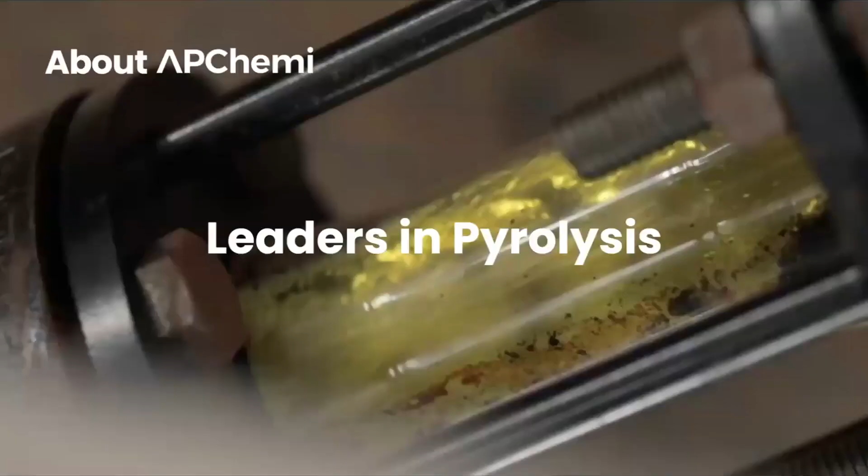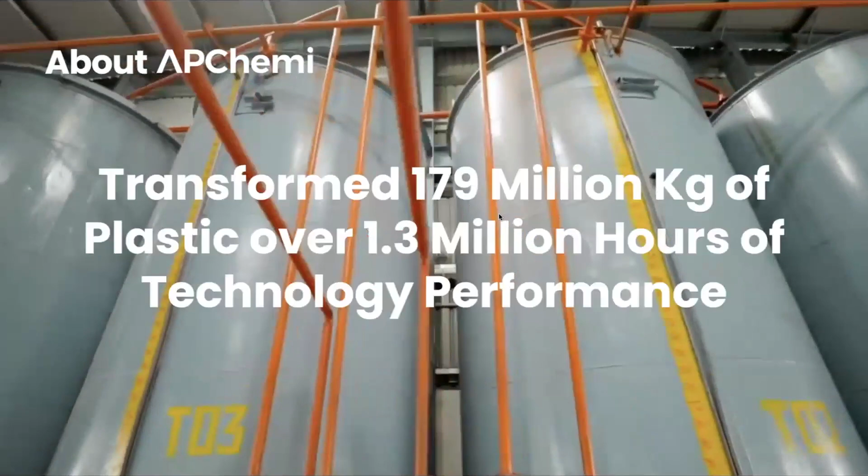A bit about APChemi before we start on the main topic. We are leaders in pyrolysis. We've turned plastic, tire and biomass into value. We've developed more than 47 plants in pyrolysis and pyrolysis oil purification. We've transformed more than 179 million kilograms of plastics over 1.3 million hours of technology performance. We're supported by Shell Petrochemicals.

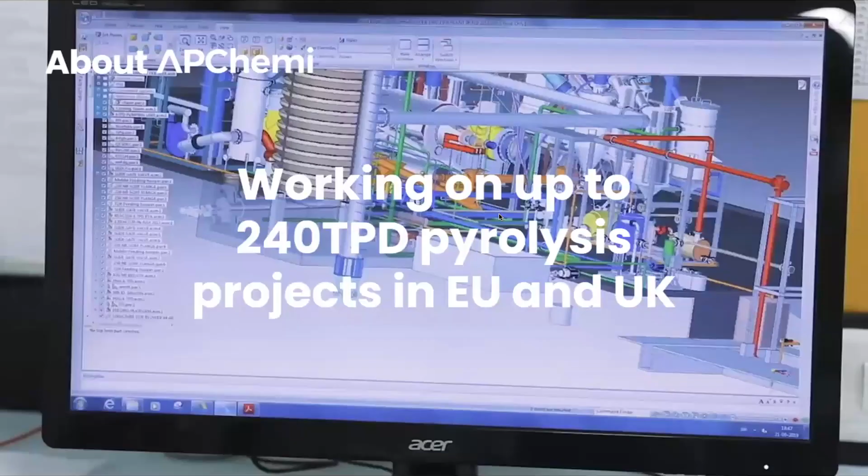Recently, we've worked with Aalborg University to raise funds to convert plastic and biomass into hydrogen. We're working on up to 240 tons per day pyrolysis projects in Europe as well as UK. The projects we have developed till date have created more than 3,000 jobs globally since 2007.

Recently, we have developed over 7 proof of concepts in chemical recycling of plastic waste, where the oil qualities have been approved at global polymer producers. Oil has also started flowing from a couple of our projects into a manufacturer of circular plastics in India.

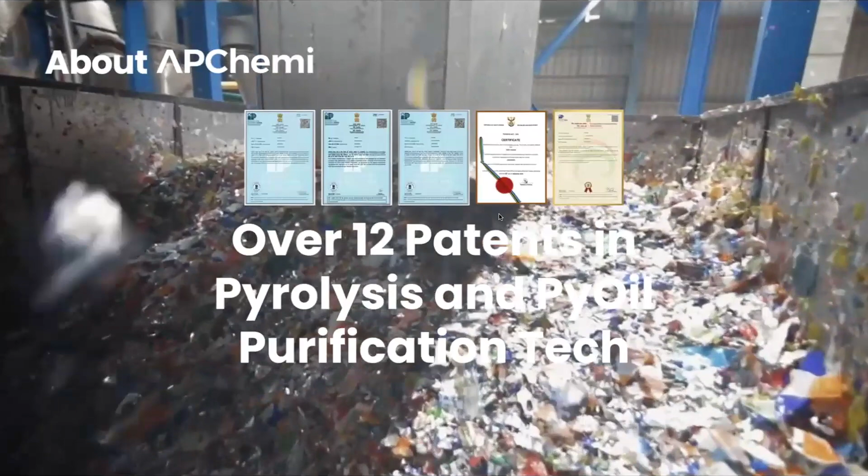So we have the technology for both pyrolysis as well as purification of pyrolysis oil. We have 12 patents in pyrolysis as well as purification of pyrolysis oil, out of which 5 patents are granted.

So all of us know this big problem of less than 10% being recycled. As Felix said, mechanical recycling cannot solve all the problems. That's why we have to look into chemical recycling. The rest all goes for landfilling or incineration. Also, a lot of plastic waste is burned.

Around 300 million metric tons per annum is burned. So from now to 2030, an additional 3.5 billion tons of carbon dioxide would go to the environment. If we don't do chemical recycling, carbon footprint also increases. Additionally, around 450 million metric tons of crude oil and gas is pumped to make new plastic.

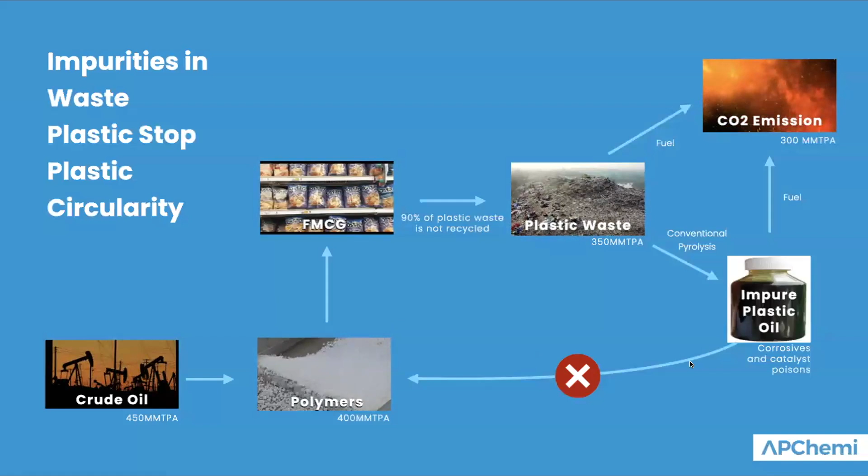So if you put the problem of linear economy together: crude oil and gas is used to make polymers, which is used by FMCGs, and then goes directly to landfills, or it is burned. Even if you convert plastic waste into oil, this oil doesn't have great quality, and that's why it cannot be used as a feedstock for production of polymers. So oil quality being one of the major concerns is the bottleneck for chemical recycling.

Let's try to explore this new field of chemical recycling from the lens of oil quality. Feedstock for chemical recycling can of course be plastic waste or tire waste. Tires are also polymers.

So plastic waste that can go into chemical recycling can be of 2 types: it can be either mechanically recyclable or mechanically non-recyclable. Many times we've seen that mechanically recyclable plastic is directly sent into a refinery and goes into a coker. And that's the distinction we have to make: are we supposed to divert plastic waste away from mechanical recycling and send it directly to refinery? Even a lot of pyrolysis players are using very high quality mechanically recyclable plastic waste to produce high quality pyrolysis oil. So is that the right way to go?

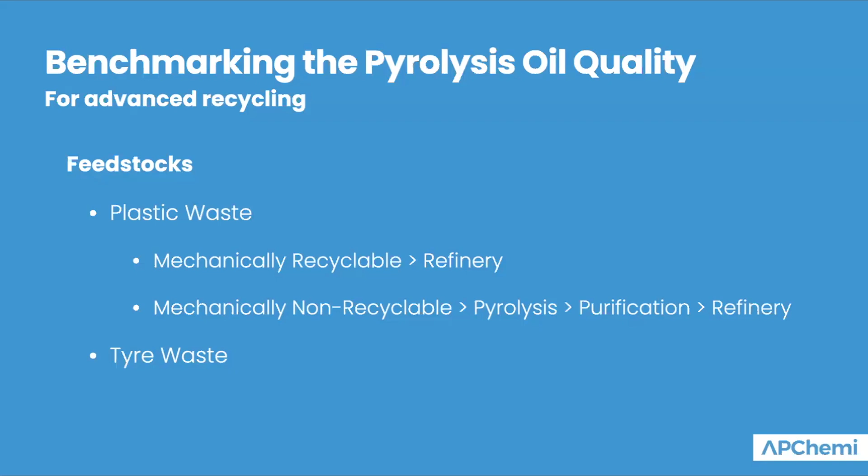Or should we focus on something that cannot be recycled mechanically, take mechanically non-recyclable plastic waste, push it through pyrolysis, do the necessary purification, and then push it to refineries for chemical recycling? That's the question that is to be answered by all the practitioners in this field. Let's take another look at different qualities of pyrolysis oil and where all they can go.

So just to tag: Q1 is what you can put into a hydrotreater or hydrocracker. Q2 is cracker, Q3 is FCC, Q4 is coker, and Q5 is raw pyrolysis oil.

Q5 is of lowest cost and lowest quality, assuming it's produced from mechanically non-recyclable plastic waste. But if you produce pyrolysis oil from mechanically recyclable plastic waste, it would probably match Q1, Q2, Q3, Q4 in terms of quality and cost, in case you try to produce it from very high quality plastics.

So Q5 is considering post-consumer plastic waste. Once you produce oil and purify it, you can produce different qualities. The coker can take more impurities, so you can produce a quality that goes into coker. Or after purification, you can do a bit of hydrotreating, hydrocracking to get control over double bonds and aromatic structures, and then it can go into a cracker as well. So this is just trying to map it out.

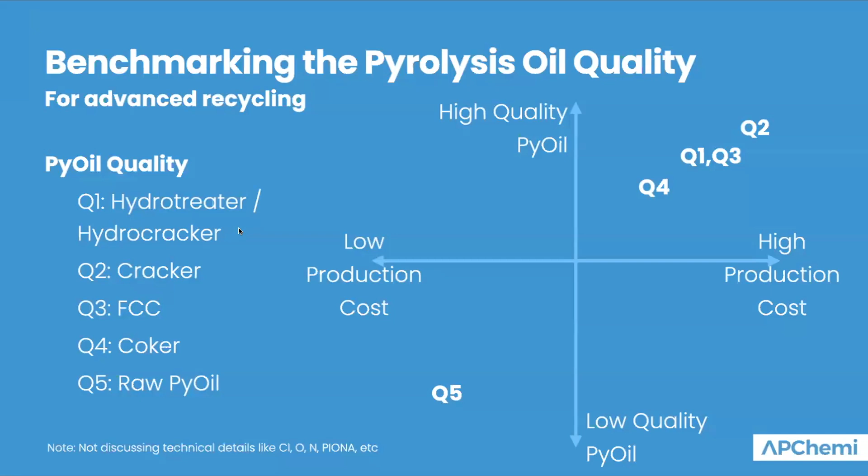Here we are not going into the nuances of chlorine, bromine, hydrogen, nitrogen, oxygen, metal, heavy metal — that requires a very detailed discussion. But this is an overall map of how pyrolysis oil quality can be mapped with respect to quality and cost.

Typical quality issues in pyrolysis oil include chlorine, bromine, oxygen, fluorine, silica, acidic impurities, metal and heavy metal impurities. We are not considering olefinic and aromatic content here, which can be corrected through hydrotreating and mild hydrocracking. These are the typical impurities that stop pyrolysis oil from going into refinery complexes, because refineries are designed for much lower levels of impurities.

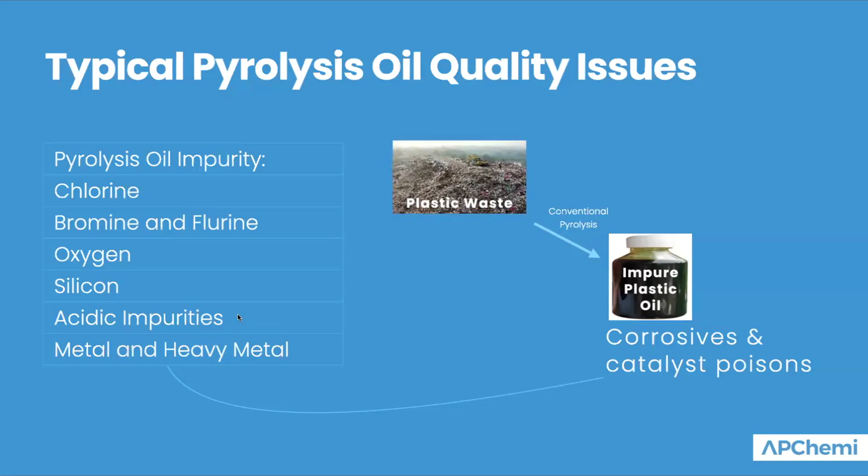So the way we at APChemi are solving this problem is we can convert contaminated mixed plastic waste, mechanically non-recyclable plastic waste, directly into purified pyrolysis oil — we call it PUROIL. Or we can take impure oil and produce pure oil out of it, removing these impurities.

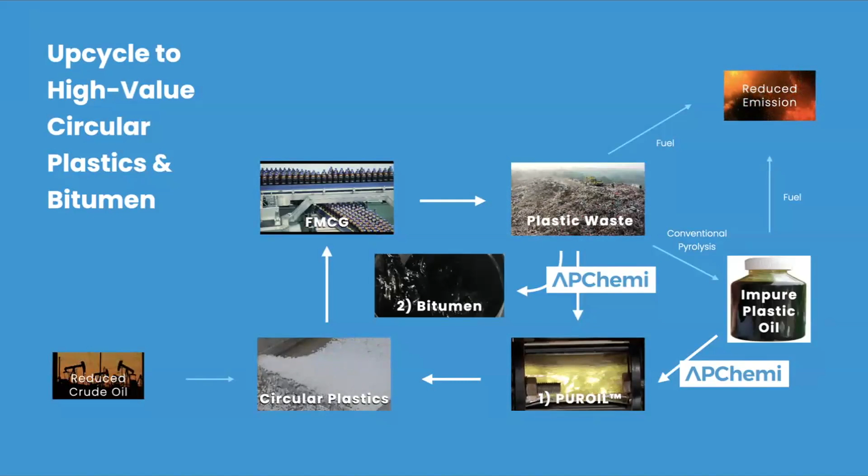In the purification process there is around 5 to 15% product loss, but we get purified pyrolysis oil, which right now is going to a coker, and is also being tried at a couple of FCC locations. Some samples we gave have also generated naphtha and jet fuel after purification of our pyrolysis oil.

In terms of purification efficiencies, we are able to remove up to 99.7% of chlorine, bromine, halogen impurities, as well as oxygen, silica, acidic, metal and heavy metal impurities. This is what enables use of PVC and PET contaminated feedstock in pyrolysis.

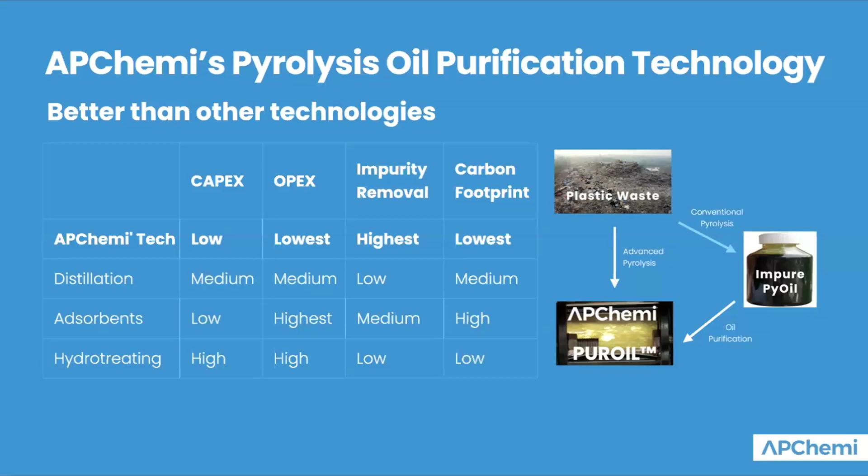This purification technology is not one process — it's a combination of 5 to 6 different processes — but it does not include distillation, adsorbents, or hydrotreating. So we are able to purify more impurities at lower capex, opex, and a lower carbon footprint. That's the advantage offered here.

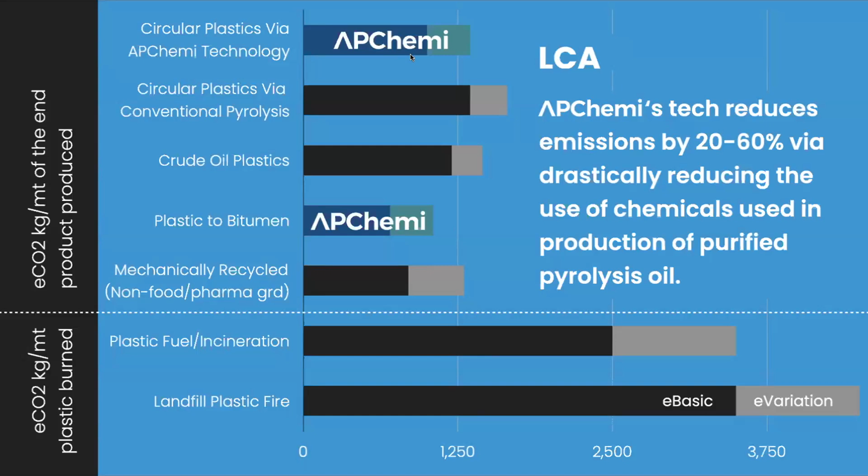Compared to conventional pyrolysis followed by purification using adsorbents and catalysts, we get the job done at a lower carbon footprint, because our technology drastically reduces the use of chemicals for purification of pyrolysis oil.

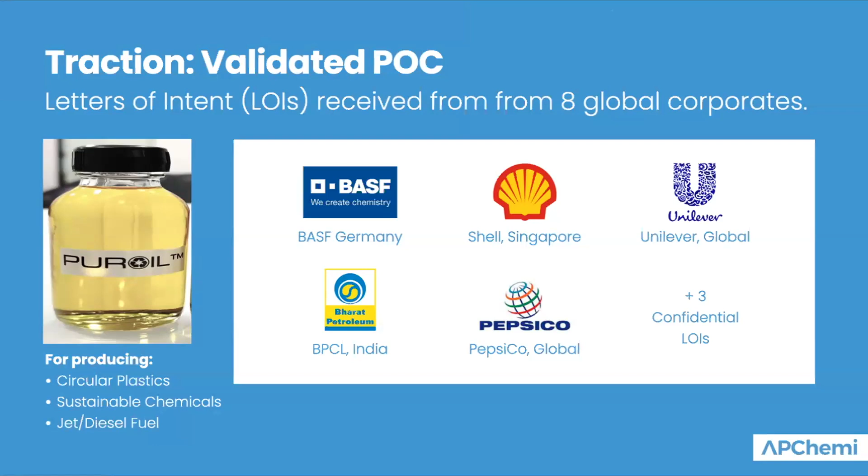We validated our technology and received written letters of intent from BASF Germany, Shell Singapore, Unilever Global, BPCL, and PepsiCo, and we look forward to our oil eventually going to all possible stakeholders in the industry.

As a first step, we have set up our own pyrolysis oil purification plant near Mumbai. This is currently producing around 1.2 kilotons per annum, and it will go up to 6 kilotons per annum in another 4 to 6 months. Samples have been approved, some quantities have already started flowing out, commissioning is in progress, and commercial production will start from July 2024.

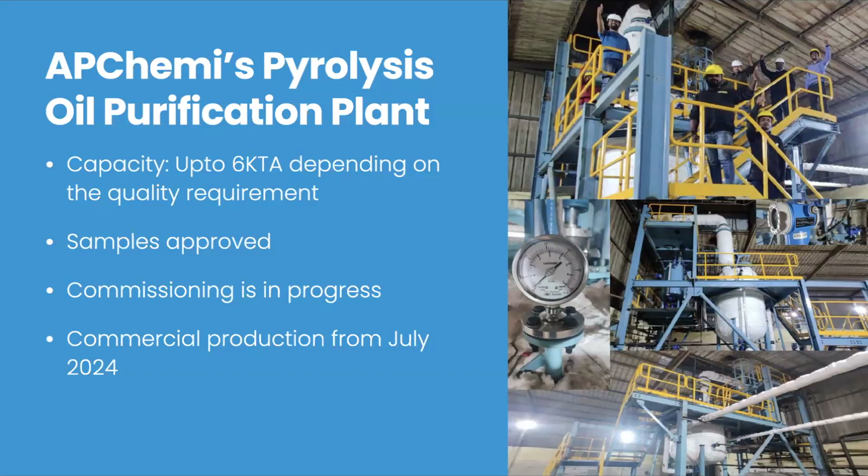So the model here is that we collect impure oil from conventional pyrolysis plants, which gets purified at our facility, and it goes to our downstream petrochemical partners for production of circular plastics and sustainable chemicals.

One of the important factors of this model is that these global petrochemical polymer producers can give us price protection for purified pyrolysis oil, and we can pass on that protection of offtake price to the impure oil producers. This way, the producers of impure pyrolysis oil will not be subjected to fluctuations of crude oil price rises up and down, and then more and more pyrolysis plants can come up.

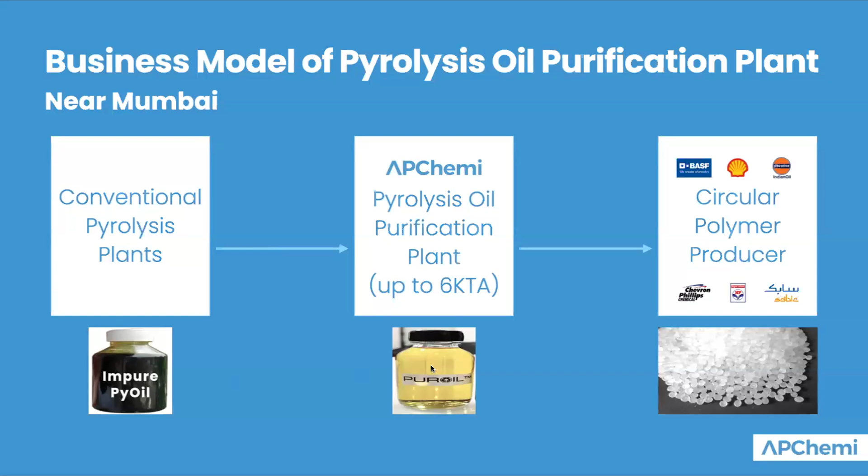So we have set up more than 47 plants till date, and we look forward to, over the period of the next 5 to 10 years, developing maybe 50 or 100 pyrolysis plants that can produce impure oil, get it aggregated, get it purified at a central place, and then supply to our downstream partners.

And in case refinery gives predictable prices to pyrolysis oil purification and pyrolysis players, then that can really ensure that the entire value chain will sustain. But if refinery players leave the pyrolysis plants and oil purification plant at the fluctuations of crude oil prices, then that value chain will not grow, which is one of the bottlenecks.

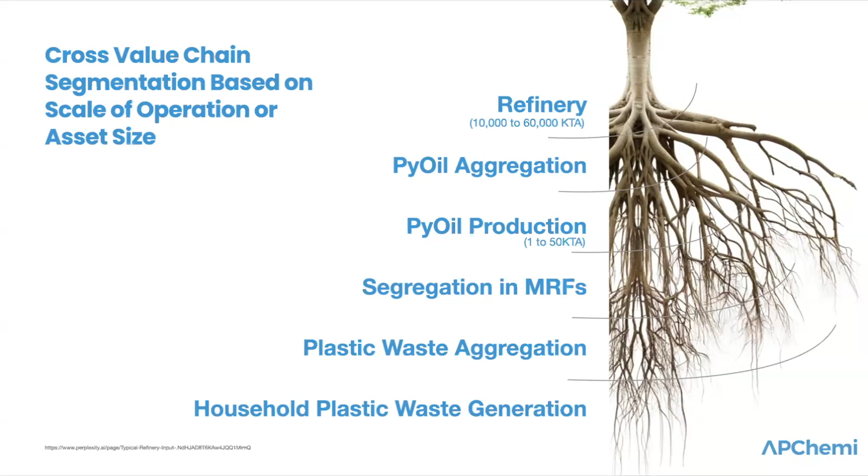I've seen a lot of projects going on hold just because the price protection is not there, and they're saying that you have to match the price of naphtha, which fluctuates a lot. So the refinery is protected against crude oil price fluctuations, but the rest of the value chain is not protected, and that's where some steps need to be taken by the entire value chain.

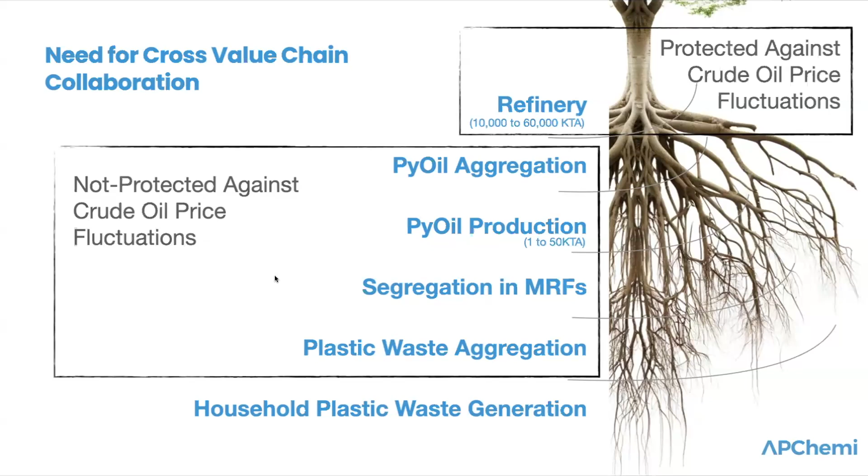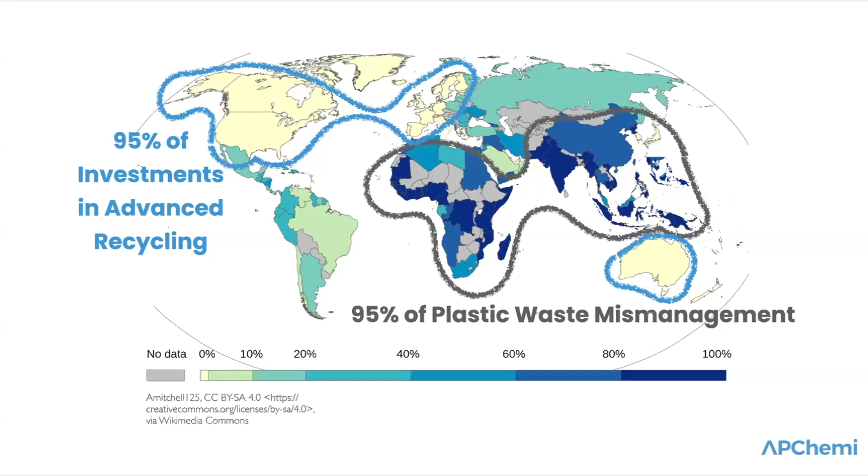Also, this slide is probably one of the reasons why we, after staying in India for more than 15 years, are moving our holding company to Netherlands - because even though 95% of mismanagement happens in Asia and Africa alone, still 95% of investments in advanced and chemical recycling happen in Europe and North America alone. So this also needs to be corrected over the period of time. This might take 5 years, this might take 10 years, but if we have to get a handle on plastic waste mismanagement, investments in Asia and Africa also need to come up.

So also the entire cross value chain collaboration between various parties is essential, whether it is the pyrolysis player that purifies the oil, petrochemical companies, polymer producers, packaging companies, FMCG consumers, and plastic waste segregators.

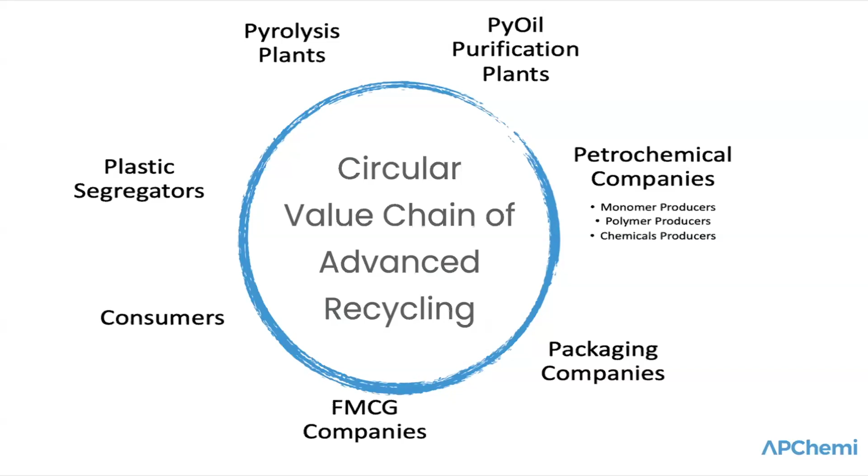Platforms like this help everybody come together and exchange ideas. But yes, the policy and laws should also help, but sometimes you have to find a solution yourself.

So let's look at some of the difficult questions that may be asked to various stakeholders in this value chain. A difficult question to a pyrolysis oil producer would be, can you produce pyrolysis oil quality that can be used in refinery without much upgrading? The straight answer is no, you have to upgrade it. Another key challenge for pyrolysis oil producers is sourcing consistent feedstock from unorganized markets.

Access to de-risking capital is another big challenge that these pyrolysis producers have. EPR, extended producer responsibility revenue, is not enough to fill the viability gap funding due to crude oil price fluctuations. So these are some of the challenges that pyrolysis oil producers across the world have.

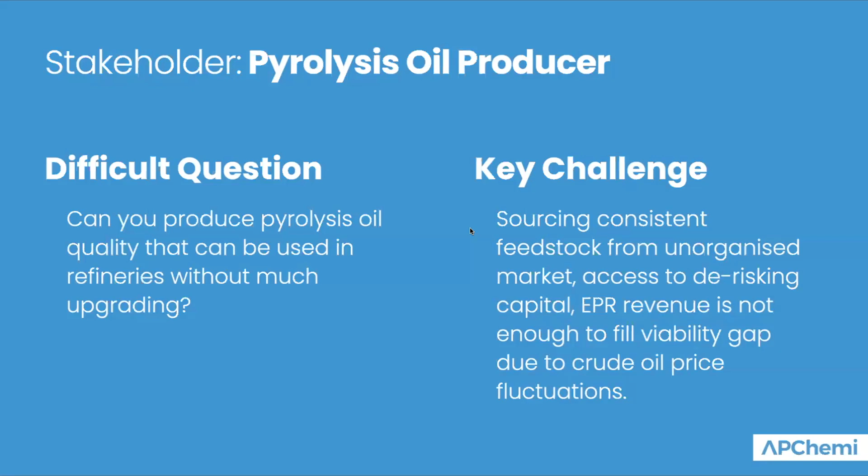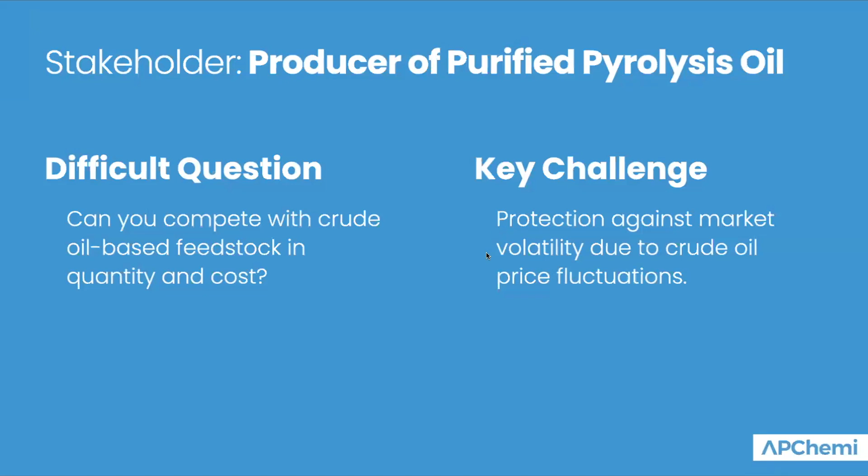Let's look at the position of someone who wants to purify the pyrolysis oil. One of the questions can be, can you compete with crude oil based feedstock in quantity and cost? The answer is no, crude oil is really cheap compared to producing purified pyrolysis oil. And the challenge is protection against market volatility due to crude oil price fluctuations. So this would be the challenge for the pyrolysis oil purification project.

Then plastic circularity - if we look at plastic circularity focused funds, the difficult question would be, how do you ensure scalability and economic viability of advanced recycling technology given the high initial capex as well as operational cost? So this is what makes a lot of investors nervous compared to mechanical recycling.

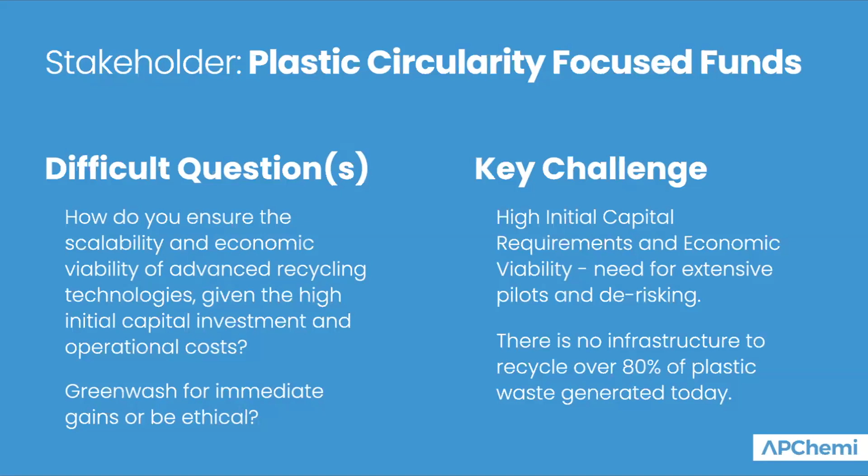These are difficult questions, and of course the key challenge is high initial capital requirement. Another challenge is that, as the earlier presentation showed, most of the infrastructure for chemical recycling is missing. So 80-90% of infrastructure for chemical recycling is yet to be built. There is a huge amount of funds required for building such a huge infrastructure.

For circular polymer producers, one of the questions would be how to source the quality and volumes of purified pyrolysis oil to meet the recycled content targets. Sourcing that much purified pyrolysis oil is not available in the market. Of course, key challenges include health, safety, and environmental challenges of poorly designed plants.

For FMCG, a difficult question is: what is the recycled content in your packaging? What is the chemical recycling viability gap funding for per packet of chips? This is one of the most difficult questions for them to answer. A lot of FMCGs say they cannot move to chemical recycling or advanced recycling because it is not commercially viable, that their production cost would go up.

But if you see, from 1 kilogram of plastic, you can manufacture 500 packets of chips from it, minimum 500. So if you divide the cost by 500, even if 1 kilogram of plastic becomes double the cost, divided by 500, the cost that would go into funding the viability gap of chemical recycling is very small. This difficult question needs to be answered by FMCG for themselves: what is the viability gap per pouch that I supply to the consumer?

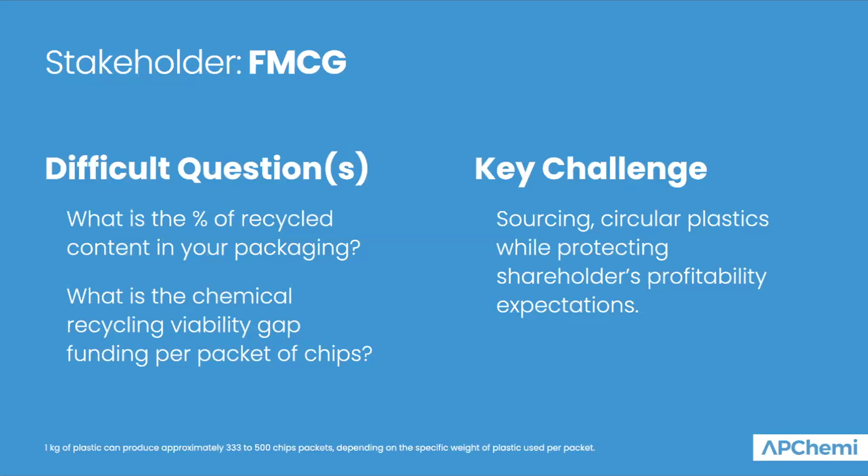Of course, the key challenge is sourcing circular plastics while protecting shareholders' profitability expectations. Another thing is that much of circular food grade plastic is not available.

For example, if somebody is an educated consumer buying a couple of packets of chips, and they know that this plastic is not going to get recycled, or there's going to be a viability gap, that's why a lot of plastic waste goes for incineration or landfilling. If they could pay, say, 2 cents, or $1, or $5 every month to a QR code, and that fund goes into filling up the viability gap, that kind of option is not available.

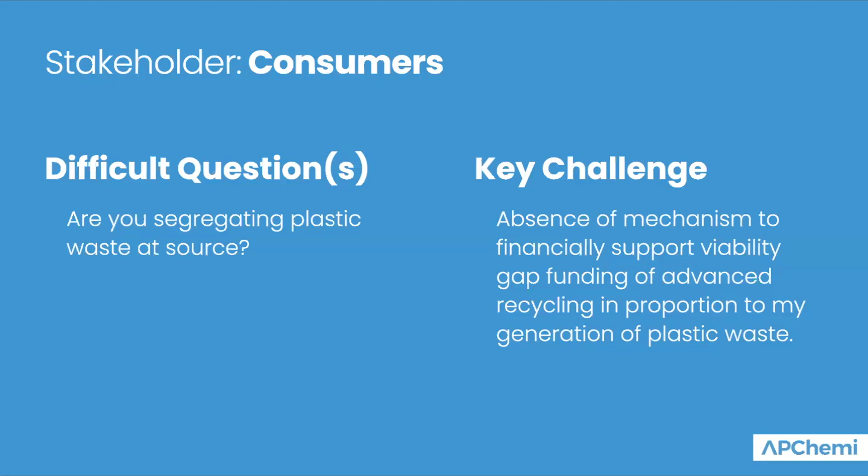Compared to that, when you fill up gas in the Netherlands, by the time you leave the fuel station, you can pay for carbon offset, and you don't have the guilt of producing the emission. So if consumers can pay at fuel stations for a carbon offset, why can't they pay, looking at the packaging, for the viability gap for chemical recycling?

Thank you so much for this opportunity, and I look forward to engaging with all of you to discuss this difficult challenge and how we can work together.